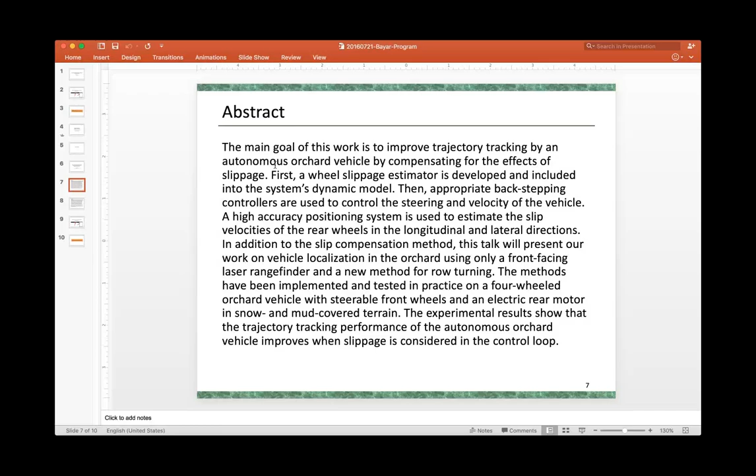So again, it's great to have Gökhan back, especially at this time of the year when not only Gökhan just had a baby a few weeks ago, so he's not extremely busy, but his country, of course, is going through some turmoil, and everybody's certainly following the events there. And still Gökhan is very generously coming to the group and presenting despite his personal situation and his country's situation. So Gökhan, we are happy to have you.

Gökhan, like I said, spent a year with our group at the Field Robotics Center as part of his PhD that he got in mechanical engineering from the Middle East Technical University in Turkey, where he also got his master's. Gökhan's specialties are in dynamics and controls and system development in general, and especially ground robots. He has a long history of developing ground robots for commercial and military projects in Turkey and with our team at Carnegie Mellon. And he now leads the robotics group at Bülent Ecevit University in Turkey, which I understand is in a city on the coast of the Black Sea, a beautiful port city, and a place I'd love to visit sometime.

Okay, for now, let's go with this one. Can you see the slide, Gökhan? No. Can anyone else see the slide that I'm sharing? That's Gökhan's own presentation. Yeah, I can see. All right, Gökhan, why don't you go back to the previous window where you could see my introduction? Actually, now the web page says, feel free to close this web page, your meeting is running in the downloaded Join Me program. So should I close the web page? Let's try to run through the app. Now the application is saying it is connecting. I am not sure, is there any restriction? That's okay. So why don't we do the following? Open the exact presentation you sent me, and I'm going to present it here. Okay, now the presentation is open. Okay, and you tell me, go to slide 2, go to slide 3, go to slide 4, and I'll do that for you. Yes.

Okay? Now let me open the Join Me web page again. Yes, now I can see. Okay. All right. So you tell me, go to next slide. Okay. This call is being recorded. Okay, Gokhan, you need to turn off the microphone on your computer. Okay, now everything is okay. Should I start? Yes. Okay. Actually, I am sorry, I did not understand what is the problem. Gokhan, are you calling on the phone or on the... You need to turn off either your phone or the microphone because they are creating echo. Now it's okay? Let's try this. Okay. I am starting. I am really sorry for this case. I did not understand. There is maybe internet restriction, I don't know.

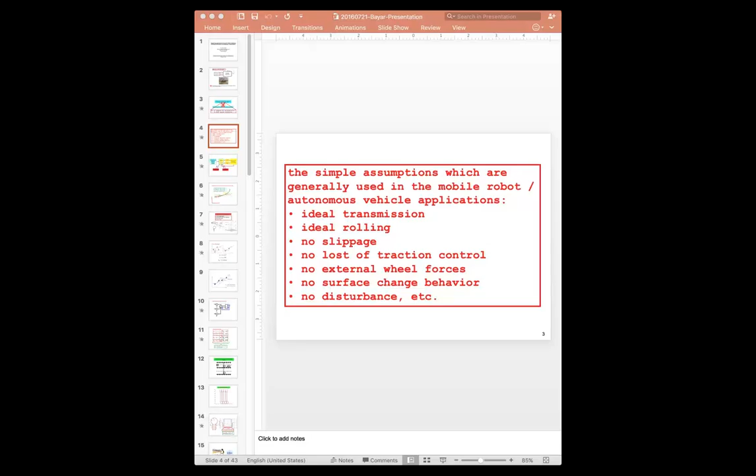So, as I said in the previous slide, there are some simple assumptions in mobile robot and autonomous vehicle applications. For instance, the assumptions are ideal transmission, ideal rolling, no slippage, no loss of traction control, no external wheel forces, no surface change behavior, no disturbance, something like that. In this study, we did not use such assumptions, I have to say that. Next slide, please.

So here is the general control system block of our system. Our system has a desired task, and this task goes through the vehicle model, and we have a controller. This controller is creating a forward velocity and steering angle for the autonomous ground vehicle. And in our case, we have investigated that the wheel-ground interaction and surface information should be inside the vehicle model. Next slide, please.

So as a general approach, the trajectory tracking control of an autonomous vehicle can be modeled by using this simple representation. The vehicle should have a desired trajectory, and in real-time operations, there is an actual reference path. The difference between the actual and desired trajectories can be modeled by using simple difference equations. The x error and y error are the positional errors, and the theta error is the orientation error of the vehicle. Next slide, please.

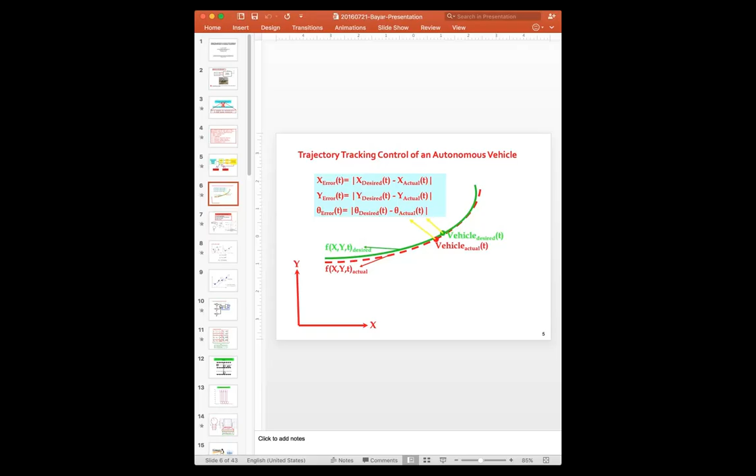And for generating the desired trajectory, some methods are used in the literature. For instance, the first method is the dynamic approach. As an example, the bicycle model is commonly used in autonomous vehicle applications. The kinematic car-like robot approach is really popular; in our study, we have also used this one. The point mass model is also used, so the vehicle is considered as a point, and Dubins curves are also used frequently in such applications. Next slide, please.

So in our study, we have used the car-like robot model, and the equation set is also shown. Why have we chosen this model? If the vehicle's forward velocity is really slow, this model works properly. Slow means, for instance, in our application, the forward velocity was between 0.5 meters per second and 2 meters per second. In order to use this model, you need only the orientation of the vehicle, its forward velocity, and the steering angle information. Next slide, please.

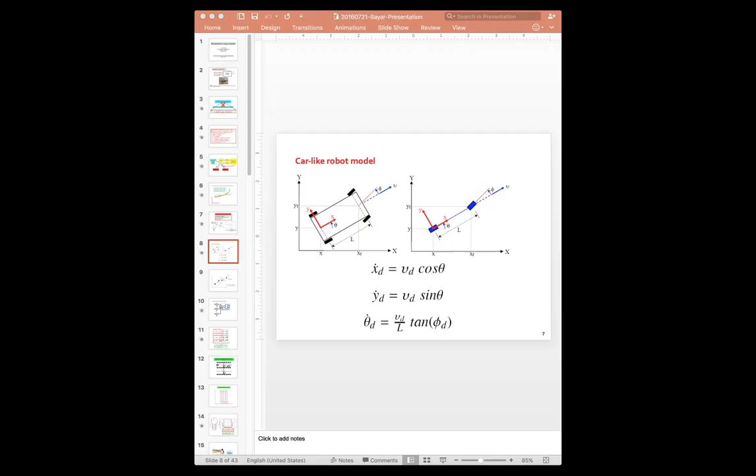So in order to construct a motion model and controller, we have used this simple representation. In this system, we have a desired path or trajectory and the vehicle in real operation, and there are always some errors in the longitudinal and lateral directions and also orientation error. So using such a simple representation, we can easily set up a model. Next slide, please.

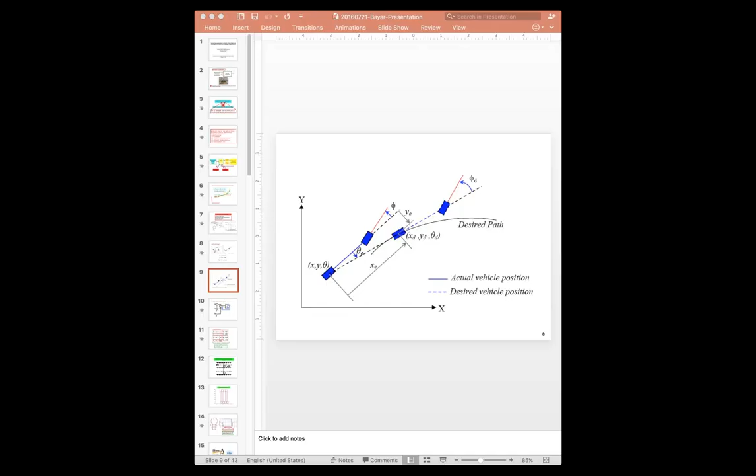So this slide shows the general idea of our control system. So we have the desired position and desired orientation for the vehicle. We have a controller. This controller is able to generate the forward velocity and steering angle commands, and also we are using some feedbacks. These feedbacks are the position, velocity, and steering angle of the vehicle, and also we are using positional and orientational errors.

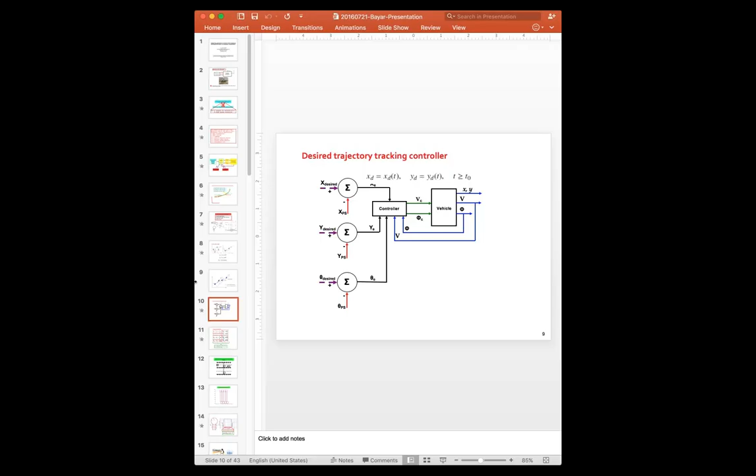For instance, in this slide, we are using the XPS and also RTK GPS, so we are calling this XPS, the high accuracy positioning feedback system. I am going to show you some details in the next slide.

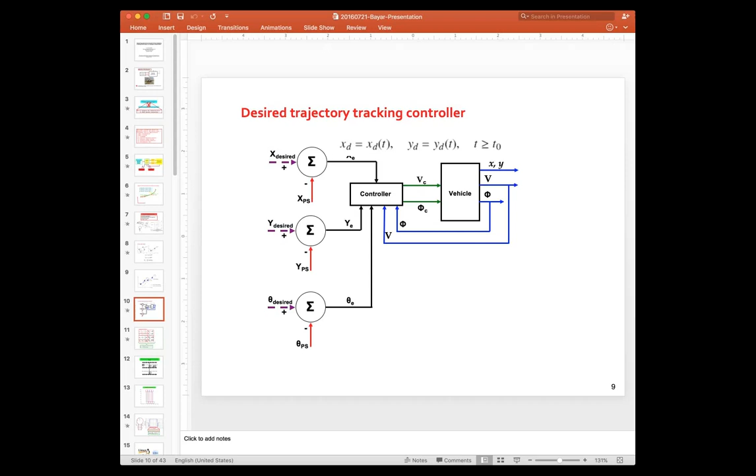Next slide, please. So as a simple operation, we have used the Lyapunov stability criteria. Using this simple approach, we have formed two Lyapunov functions, and using these functions, at the end, we were able to obtain the controllers for forward velocity of the vehicle and steering angle. Next slide, please.

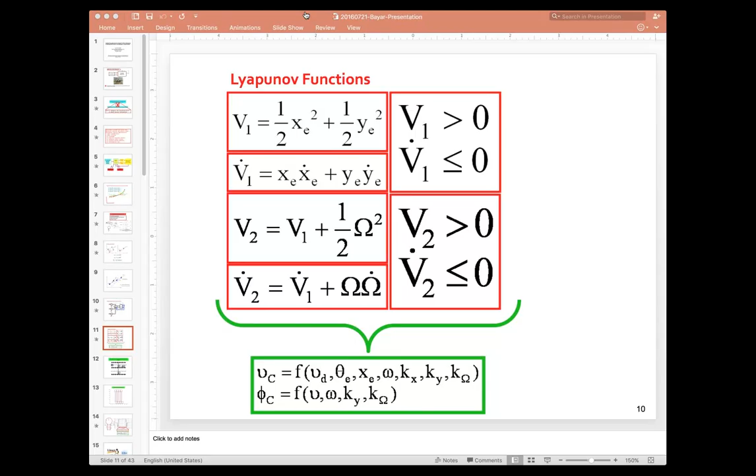And in this slide, I want to show the working environment of an orchard robot vehicle. Here there are some trees, and these trees are forming the lines of trees or rows of trees. In this slide, the objective is that the vehicle should be able to follow the desired trajectory, which lies on the center of two consecutive tree lines.

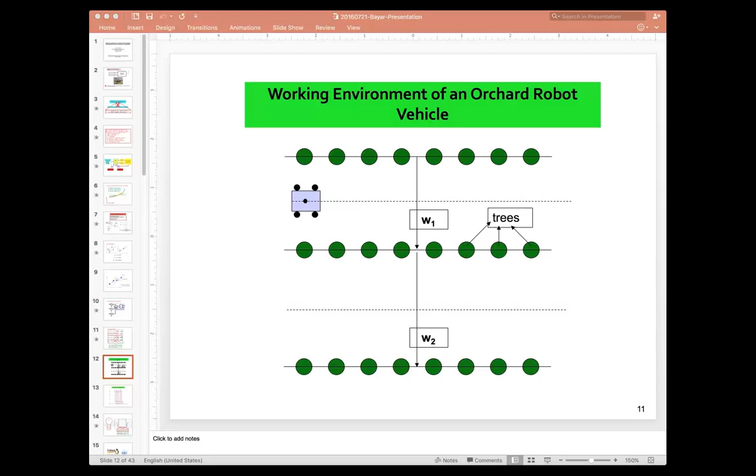As you can see, all the widths of the rows of trees are different. For instance, W1, W2, something like that. And the objective is to find these values also and track the reference path. Next slide, please.

So here, I want to show you a reference trajectory that we have developed. So here the straight lines are showing the reference trajectory, which lies on the centers of two neighbor rows, and the circles are showing us the turning geometry from one row to another. Next slide, please.

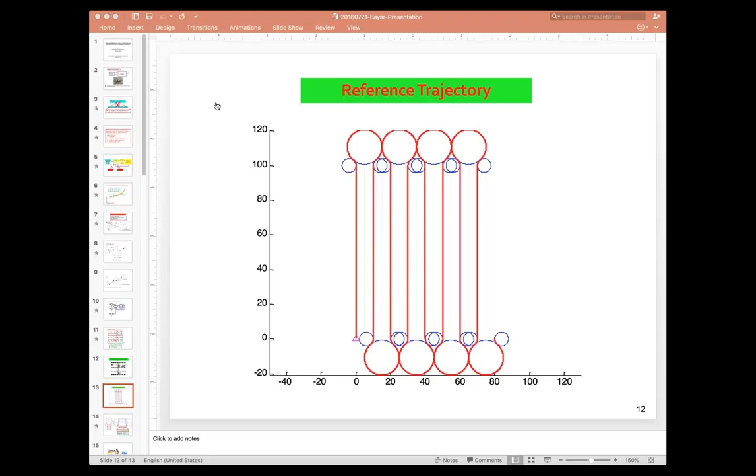So this slide is about the turning geometry. It is one of the problems in real applications. Why? Since generally in some orchards there is not always available space for turning. So in order to solve this problem, we have developed such a geometry. So using the geometry variables, we can easily set the turning geometry.

And in the plot shown on the right, in order to create such a geometry, we have a steering angle profile. The steering angle profile is shown by the dashed lines. However, as you can see, this geometry contains such sharp turning options.

So think about it: in general, the steering mechanism is a mechanical system. So sharp geometry may harm this mechanical system. So as a solution, we have developed a fourth order polynomial so that the steering angle profile remains smoother. Next slide, please.

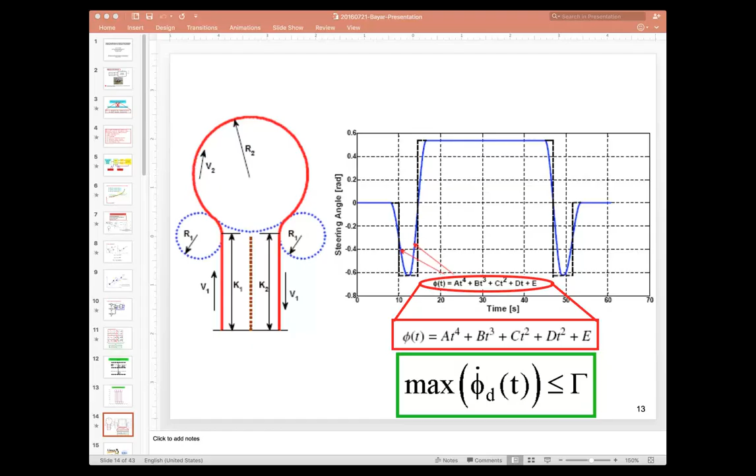So I have to say that in our applications, we developed our algorithms in Robot Operating System ROS under Linux, and we have coded all the operations in C++ environments. Next slide, please.

So this is the general picture of the experimental orchards. The experimental orchards have 8 lines of trees and 7 rows of trees. And this slide shows the real length or width of the rows information. And also the picture has a vehicle, and we have used this autonomous orchard vehicle in our applications. Next slide, please.

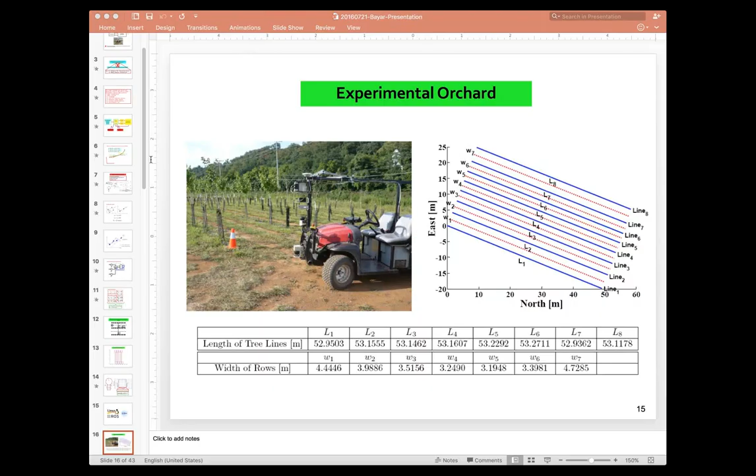And now I want to show you some details. We did many experiments to test the behavior of the proposed model, and also we checked the performance of the model. In the first experiment, we just tested the performance of it, so we did not include the slippage information. In this experiment, we used the RTK GPS for getting the position information. Next slide, please.

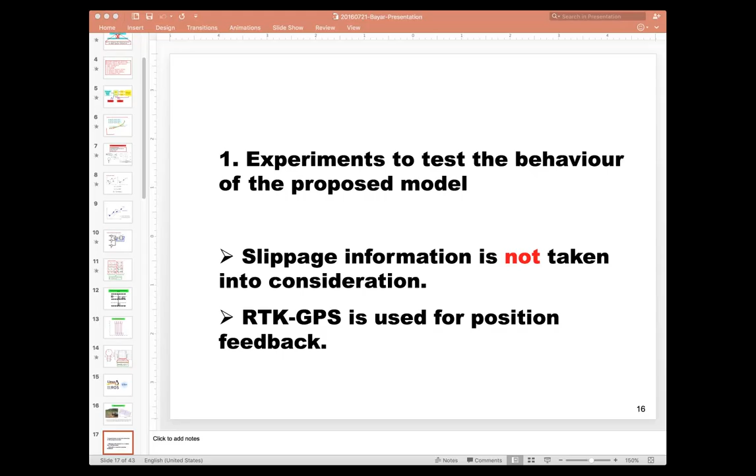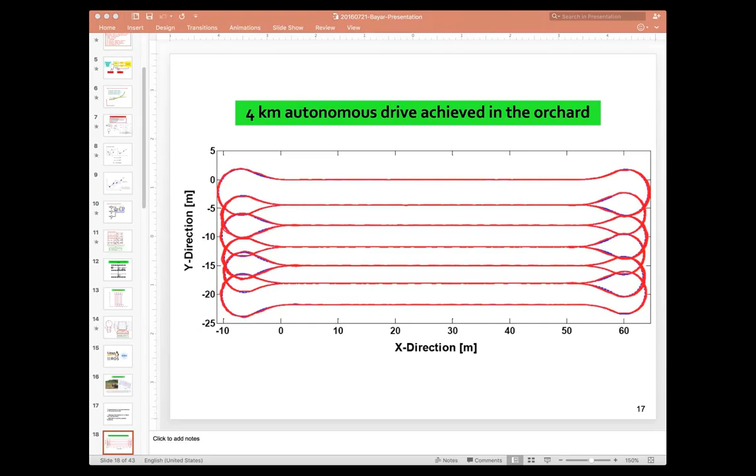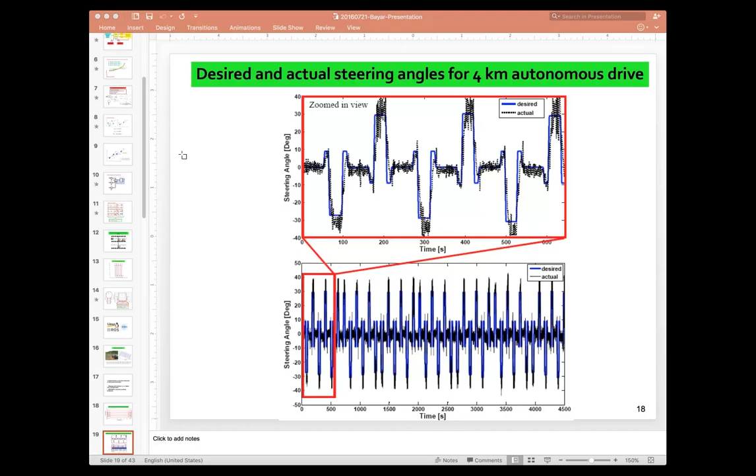So in order to complete reference trajectory tracking control, the steering angle profile and output is really important. This slide shows the desired and actual steering angles for the 4-kilometer autonomous drive. As seen, the reference steering angle profile is followed by the controller. Next slide, please.

Now I have a video actually, and how can I show you? I don't know. Maybe Marcel can show you. Marcel, if you cannot find the video, we can go to the next slide.

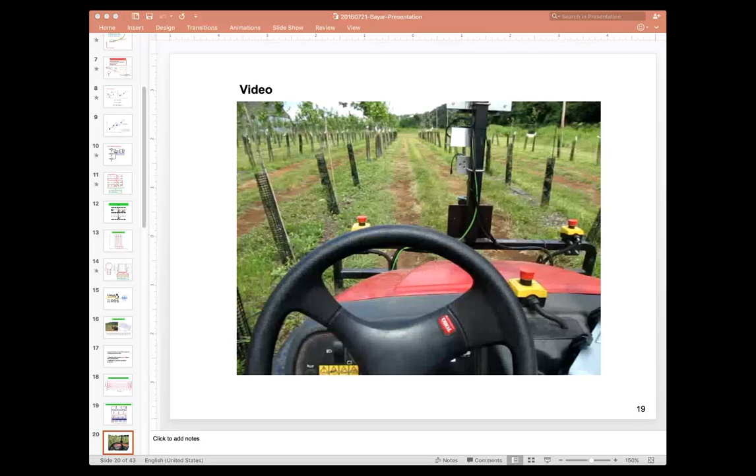And in the first experiment, we test the behavior of the proposed model. And also in this experiment, we did not use the slippage information. Still, we are checking the performance of the control system. And in this experiment, we replaced the RTK GPS with the laser scanner rangefinder. And now we are detecting the trees and also estimating the rows of trees. Next slide, please.

Yes, Marcel. Now the video is right top, actually. Right top. No, right top. Yes, this one. Tell me the number 1, 2, 3, 4, or 5. Oh, 5. 5.

Yes, this video shows the steering wheel actually. Now the controller generates the required commands for the forward velocity and steering angle. In this experiment, the forward velocity was 1 meter per second.

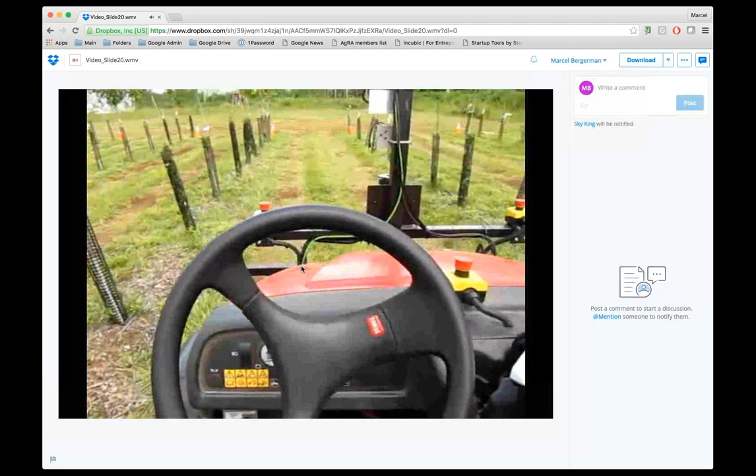And in this experiment, we did not use the laser scanner and we did not use the slippage information. We were checking only the performance and accuracy of the proposed model.

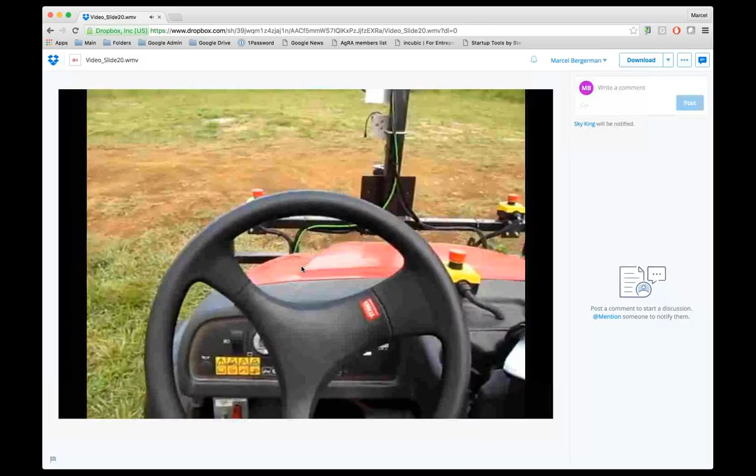And in the second experiment, we replaced the RTK GPS with the laser scanner rangefinder. Next slide, please, Marcel.

And this still we are using the same control system block. Only the laser scanner rangefinder is replaced in our system. Next slide, please.

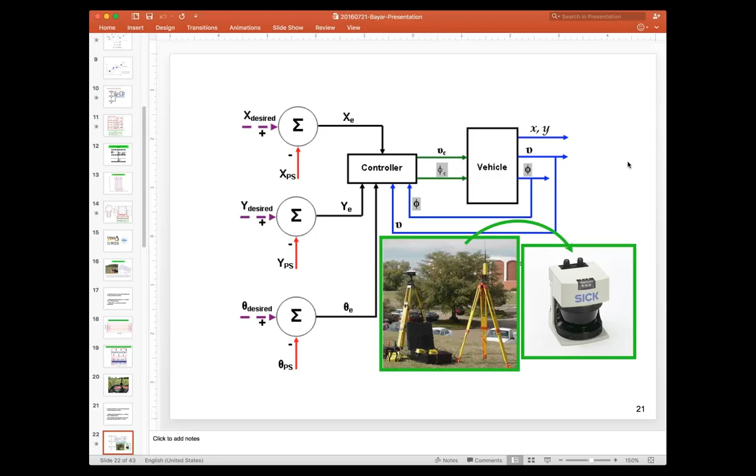And in this experiment, we use this autonomous orchard vehicle. The vehicle has a laser scanner rangefinder located at front mid-center of the vehicle. Now the purpose of using the laser scanner is to detect the trees and estimate the rows of trees. Next slide, please.

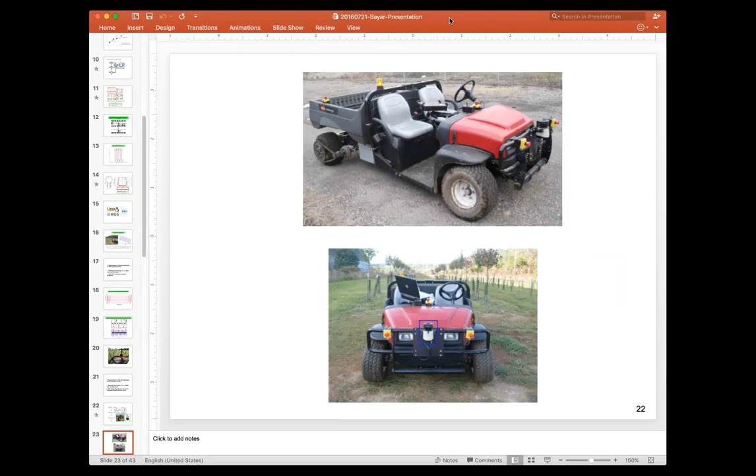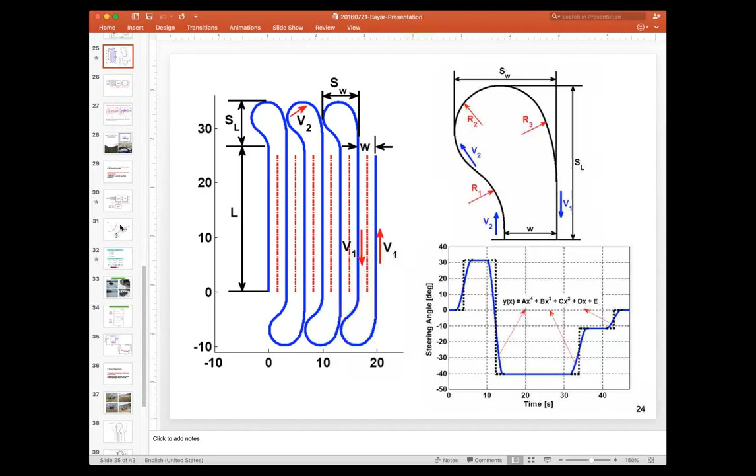So as you can see, in the right top picture, we are using a different turning geometry. However, the procedure is the same. We are still using the fourth order polynomial in order to make the steering angle profile smoother. Next slide, please.

And this still we are using the same control block, and we have a controller now. We are calling this model-based controller, and we have a row detection system. This row detection block is using the laser scanner data. All the tree detection and row estimation procedure are done in this block. We have still the trajectory generator, and at the end, our objective is to try to follow the reference trajectory with minimum tracking errors. Next slide, please.

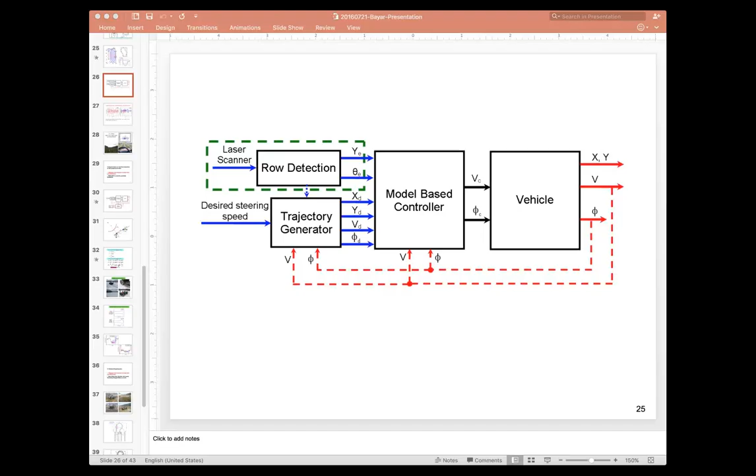And I want to show you one of the results, and these results are obtained in the first row of the orchard. The width of the orchard is nearly 4.5 meters, and its length is about 53 meters. And in order to show the performance of our proposed system, we did our experiments using our system and the pure pursuit controller.

The mobile robots and autonomous vehicle researchers know that the pure pursuit controller is one of the simplest approaches for tracking a reference trajectory. So as you can see from these results, our method generates a really smooth steering angle profile, and the right plot shows the distance between the vehicle and the center of the row. So in both results, our procedure generates really successful results compared to the pure pursuit control. Next slide, please.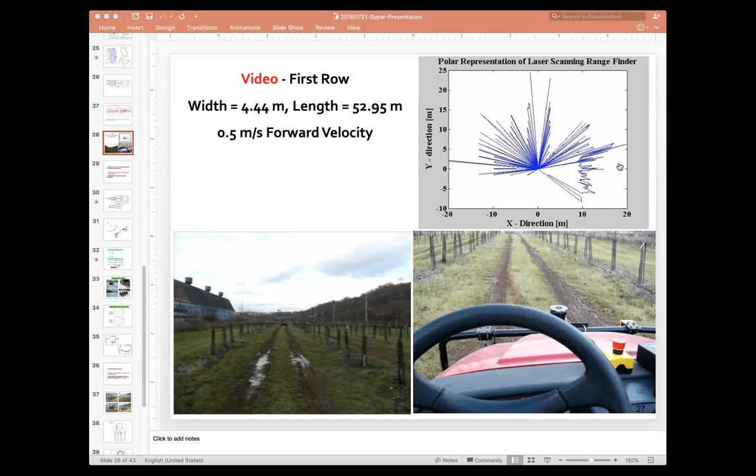In the next experiment, we are still testing the behavior and performance of the proposed system. Now we are using the slippage information, and also RTK GPS is used for the position feedback.

Here is the control system block. We are using the same control system, and now we have a slippage estimation sub-block, which can be fed by RTK GPS, laser system, or odometer and steering system.

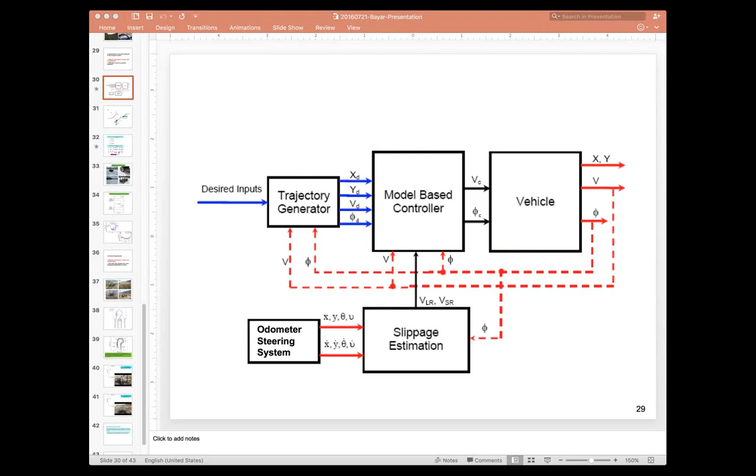Here is the general idea of slippage. We are assuming that slippage occurs at front and rear of the vehicle in longitudinal and lateral directions, and there are two slip variables: the front slip angle and rear slip angle. Using the methodology, we can find out these slip variables.

We are using the car-like robot model shown in the previous slide. Without slippage information, the car-like robot model is as seen in the slide, but if we adapt the slippage information into our model, it changes a little bit. In our experiments, the longitudinal velocity is really slow, between 0.5 and 2 meters per second, and the steering mechanism works at the front of the vehicle. So as an assumption, the slippage at the front is taken to be zero, and now we try to find the slippage occurring at the rear of the vehicle.

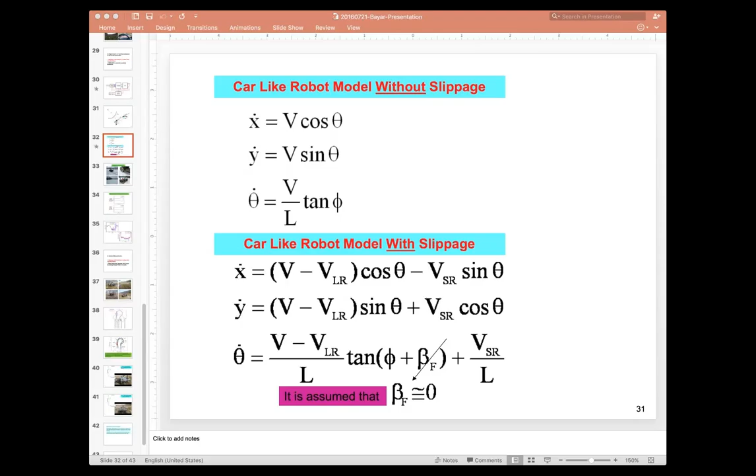Before testing our system in the real orchard, we tested it on snow. Here we have some pictures — the slippage experiments were done on the Carnegie Mellon University campus. Now I will show you some results.

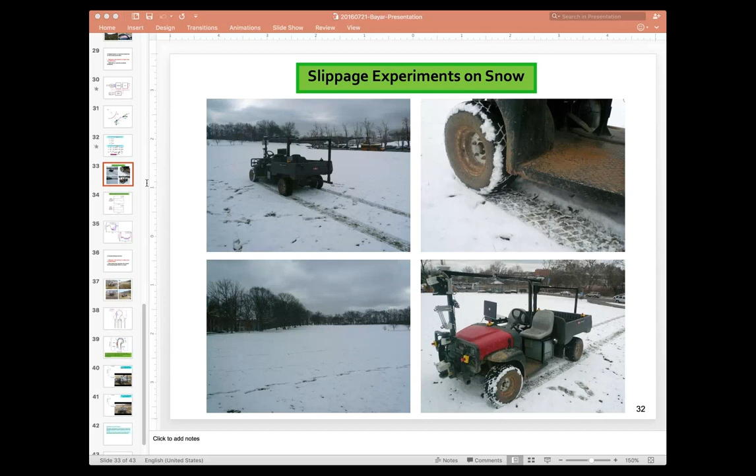In these results, the trajectory tracking control with and without adding slippage estimation are shown. If we did not add the slippage information into the overall model, the trajectory tracking performance is not good. If slippage estimation is used inside the model, the desired trajectory tracking control is really nice.

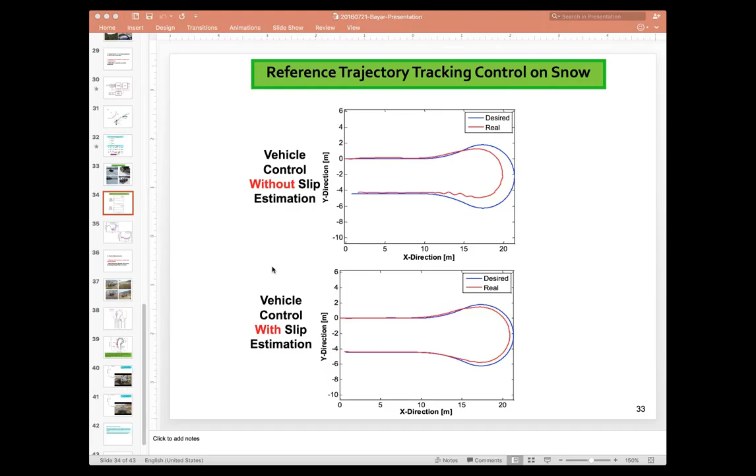In autonomous mode, the steering angle and forward velocity are important. If the estimation procedure is used, the steering angle profile is really calm, but without it, the steering angle becomes really crazy, which is not good for the mechanics of the steering system. Also, the forward speed is better than in the case where the estimation procedure is not used.

After doing these experiments, we tested our system in an orchard. Slippage information, the system model, and controller are used, and now we are also using the road detection system — all the systems are combined in this experiment.

As you can see from this picture, the experiment was tested on a total mud surface in the experimental orchard, which was a good opportunity for us to see the performance and accuracy of the system.

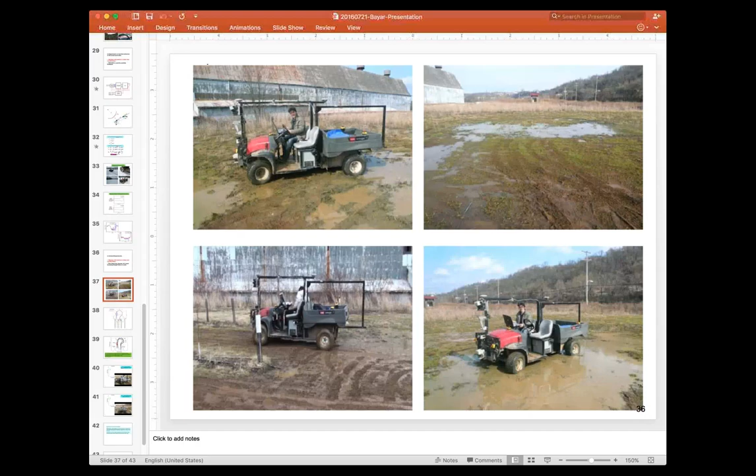In this study, we considered that the vehicle should follow a desired trajectory to track the straight reference line, and also to track the turning geometry, which is important from one row to another. There should be a target box, and the vehicle should reach this box so that afterward it can easily go to the next row.

This slide shows the results of the slippage estimation. I will show you four results. The results shown by E1 are obtained using the RTK GPS feedback system, without slippage estimation. The results shown by E2 are obtained using the slippage estimation procedure together with RTK GPS feedback.

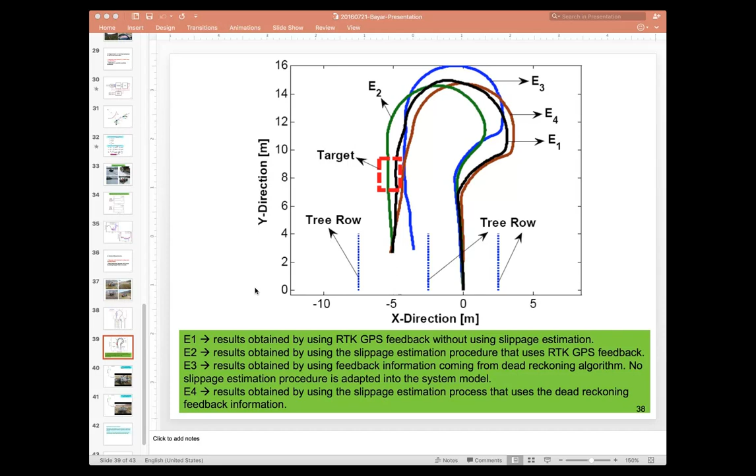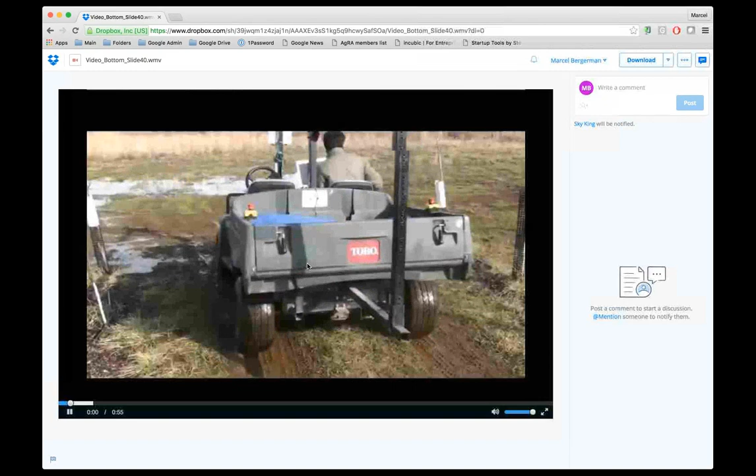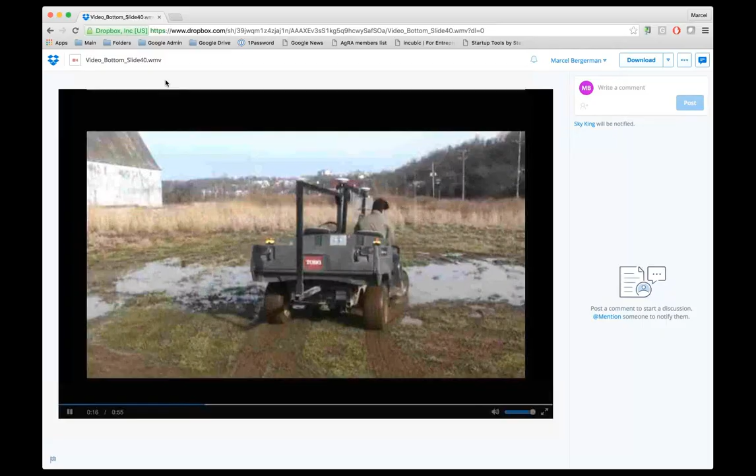Now we have two videos. The first video shows results about turning control without using slippage estimation, and the other video shows the ground truth information. If we watch these two videos, we can easily see the turning geometry and the performance of the controller and system model.

Marcel, can we see the other ground truth video? Yes, the bottom one. Yes, this one.

So this is the ground truth video. While the vehicle was in motion, I logged the RTK GPS data in order to create this video. The objective is to follow the desired trajectory and reach the target box. If the vehicle reaches the target box, it can easily enter the next row.

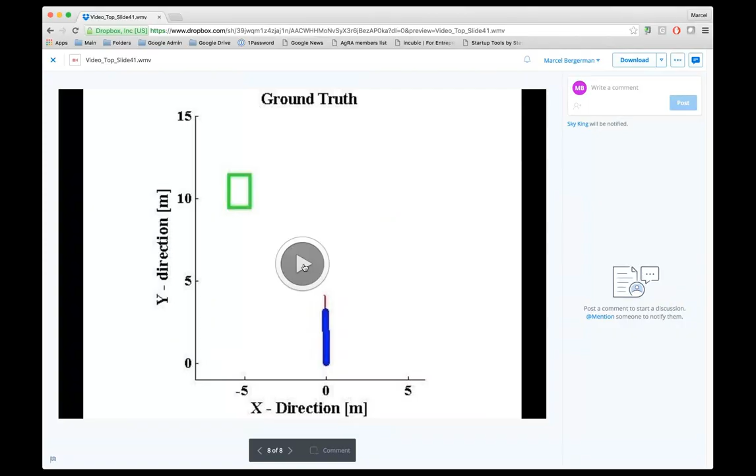Marcel, we can see the other video. Yes, this one. This video again shows the ground truth information, the RTK GPS data, and in this case we are using the slippage estimation procedure.

So as you can see, after adding the slippage information, the geometry, the trajectory, is followed and the vehicle reaches the target box. Next slide, please, Marcel.

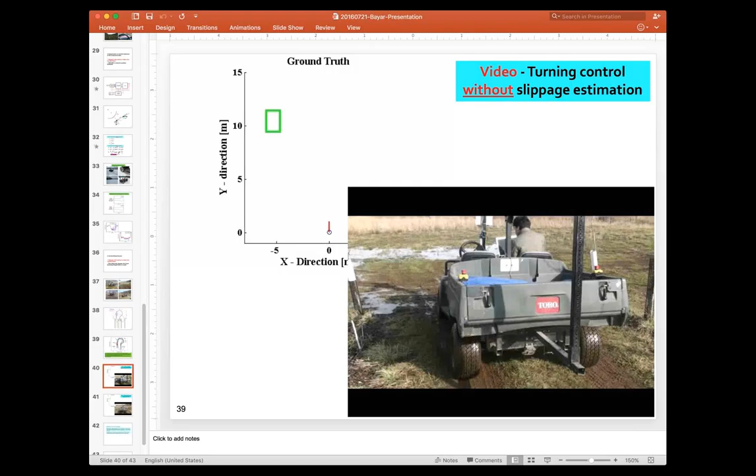Next slide. Actually, we are done now. We have published all the details and results of the study on improving the trajectory tracking performance of autonomous orchard vehicles using wheel slip compensation in the Biosystems Engineering Journal. I would like to send my special thanks to the co-authors of this paper. And my presentation now is over.

Thank you for your attention. I am so sorry for this case. I don't know, actually I tried to prepare some nice videos, nice presentation. However, there must be a restriction on the web. I am really so sorry. Don't worry, those things happen every now and then.